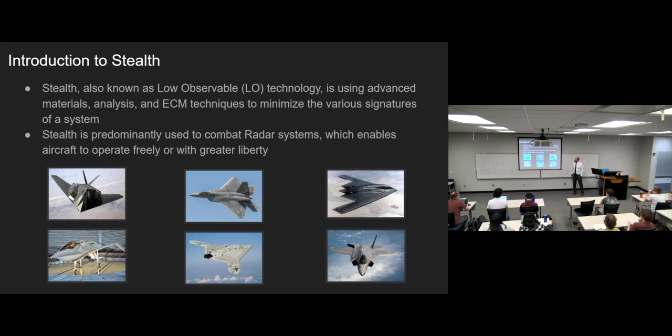Yeah. For anybody who saw the F-47 release that they came out with recently for Boeing's award, it looks starkly similar to this. And if you saw the Air Force new recruiting video, they have a very short shot of what it is. They have a half-second clip. Or if you would recognize the F-22 over here, if you've seen any Transformers movies, that is Starscream right there. Who knew Starscream was a Lockheed Martin ad? F-22 Raptor.

All right, real quick disclaimer. I work at Northrop Grumman. Northrop Grumman has made a lot of these vehicles, particularly this one, and has contributed to all the others, minus the Boeing one. But I personally have not. And I promise I'm not leaking any classified or confidential information. All of this information is open source. All of my information comes predominantly from this stack of textbooks, and I'll discuss these more later on. So I promise we're not doing any code blues here.

So we're going to go into radar cross-section. I assure you these are the only math formulas in the entire slide. I kept it light this time. So radar cross-section is a value that expresses the magnitude of a radar return relative to the apparent size of that target in square meters. Basically, how much energy is reflected per square meter. And the actual official unit for radar cross-section is dBsm, decibels per square meter.

If you Google radar cross-section, people will express it in units of just square meters, but that's not actually very helpful at all. In real life, you have to normalize by adding that decibel scaling to it. It's like 10 log 10 of your square meter size, or your radar cross-section. And obviously, the larger your radar cross-section is, the easier you are to detect. The actual official mathematical definition is rather horrific, and these are still shortened versions of it.

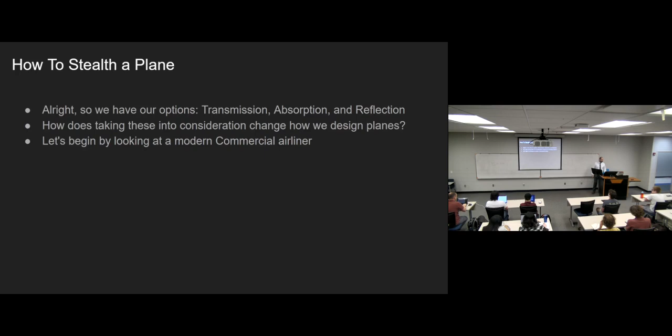And we're going to start by looking at everyone's favorite commercial airliner, the Boeing 737. So, first thing, you guys are all radars, you're looking right at this plane. What are the first problems you might see looking directly into this thing's face? Any ideas? What do we got? Big cross section. Pretty fat, pretty big. And we're gonna get into this, I've got like 4 slides on it. Very colorful as well. Yeah, it's very colorful.

But, huge issue, turbines, these engines. Huge problem. Engines, large trailing wings, large vertical and horizontal aft fins, ailerons. We'll get into why these things are issues, but keep in mind, when you're looking at a vehicle, you're looking for engines, wings, wing sweep, total face-on cross-section, and specifically, this is a big one, any 90-degree angles. We'll get into why that's a huge issue in a second. But the answer is you all already know this. You've been familiar with it since you were probably about 4 years old.

So, we're gonna break this out. The average jet airliner has a radar cross-section of about 1,000 square meters. That is massive. From a radar's perspective, it lights up like a Christmas tree and it is extremely easy to discern what's going on there. So if you ever see reports of a commercial airliner being shot down in war, it was 100% on purpose because they know exactly what that thing is. There is no hiding it. It is obviously a commercial airliner, not military. No military vehicle worth its salt has a cross-section of 1,000 square meters. But it has a litany of issues, as mentioned.

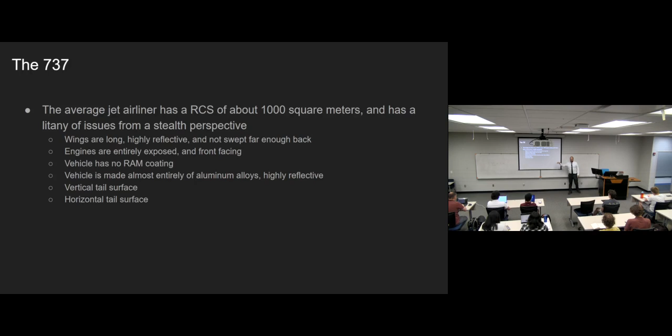So, let's talk shop. How is it that the Flying Dorito, otherwise known as the B-2 Spirit, which has a wingspan almost double that of a 737, has a radar cross-section 1,000,000 times smaller?

How did this happen, right? This vehicle is bigger, it's heavier, it's slower. I think it's actually a bit faster than this thing, and yet this thing glows up like a Christmas tree. This thing is the size of a bumblebee on radar. How'd they pull this off? The answer is with a lot of money, but a lot of science too.

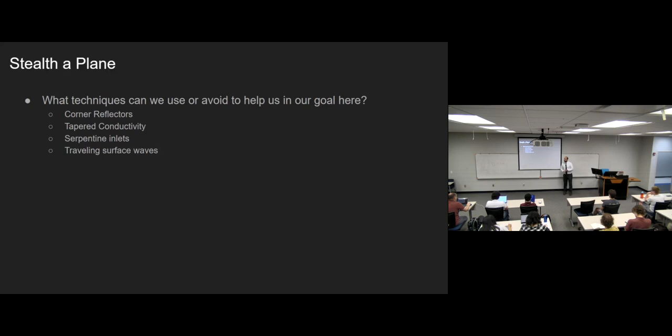So, we're gonna drop some stuff to look for. When you're designing or thinking about stealth vehicles, things you need to care about: corner reflectors, tapered conductivity, and we'll explain what all these things are, serpentine inlets, and management of traveling surface waves. And how this is done, we'll begin.

As I said, you've all been familiar with these since you're 4 years old. Corner reflectors, also known as retroreflectors, are used everywhere. Bikes, the funny vests that the people wear at night when they're trying not to get hit by a car. They're a great way to keep you from getting hit by a car, but it's also a great way of helping you get hit by missiles. So it's not great. The whole point of a corner reflector or a retroreflector is any 90-degree angle, if hit by any angle of ray, will reflect that ray back to where it came from.

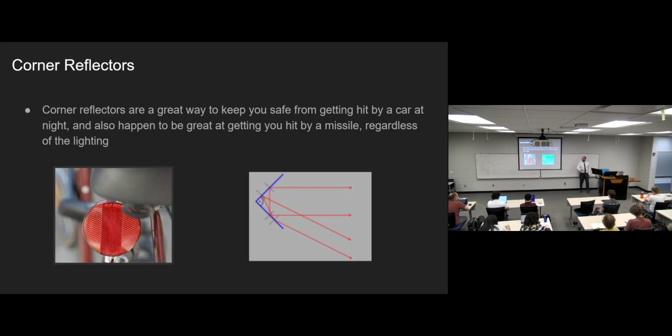So if you aim your flashlight at this retroreflector and you move all over the place, it will still look bright to you because the light will come right back to the source every single time. Which means if you have one of these on a plane, that radar is going to hit you and go right back. And they're going to see you, and they're going to see you pretty well. So you need to avoid these. But let me go back real quick to this.

This is the largest corner reflector ever seen by man. Anytime you see a vertical and horizontal tail surface, that is a stealth no-no. And you'll see a lot of older US military vehicles have that. The F-15, I have an example coming up later. The F-15 is famous for its 2 vertical tail surfaces, and then of course has its horizontal ones immediately there.

Then of course we're still using that vehicle, but we're using the F-15EX. What did Boeing do with that? They tilted these a little bit, and that helped the radar cross-section massively, and it cost almost nothing. So knowing these simple rules, which they did not know when they originally designed these vehicles, is enough to save lives, billions of dollars. It's pretty interesting, but we'll keep moving on back through here.

So the next thing I talked about was tapered conductivity. So what's going on here? Again, we get to cheat and we can call this all optics. Everyone's familiar with Snell's law. Who here does not know what Snell's law is? All right, real quick, I'm still gonna discuss it. Snell's law is a physics concept that has to do with fundamental geometric optics. Basically, and everyone's familiar with this if you've just had a glass of water before, light bends whenever it goes through different media, aka different refractive indices, which is just a material dependent parameter, right?

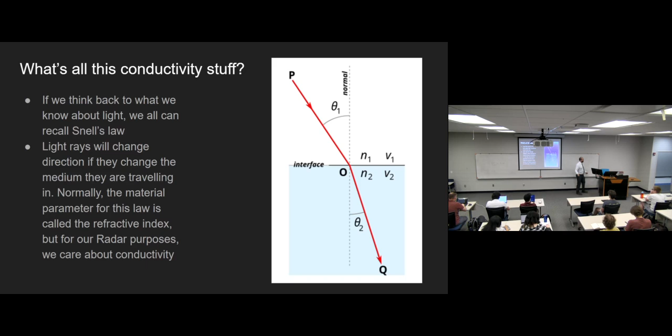The difference here is, for our purposes, the material no longer has a refractive index. It has what's known as a conductivity. Everyone knows what that is. Copper's conductive, rubber is not, right? Everything has a conductivity, and we're gonna abuse that fact to stealth our planes. So, they have markers in here. Yeah, whatever. Discontinuities. Just how light bends when it hits a discontinuity or a difference between 2 media.

Yeah. Got more for you. Oh, Sebastian, what was that?

So, a discontinuity is very simple. Let's call this, we'll call this aluminum, and we'll call this copper. These things have similar yet different conductivities. If I am just a block of copper, a block of aluminum, and I have an electromagnetic wave traveling through here, the second that wave hits this discontinuity, right now it was all just current inside of metal.

But the second it hits this material discontinuity, it radiates and acts like an antenna. And that's a huge issue because that happens literally all the time, and it's related to some of that TEMPEST stuff that we'll talk about at the end for any of those interested.

But this kind of thing happens all the time. Discontinuities in circuits, PCBs. When you're designing high-frequency antennas, high-frequency circuit boards, your whole purpose is to prevent discontinuities. And a funny thing, just for anyone doing circuits later in life, let's say this is all copper. If I have a copper trace of this width, and then I need a thicker one or something, maybe there's a pin here. Guess what? Discontinuity. Because unfortunately, conductivity, while it is a material-dependent parameter, actually can change based on just dimensions alone.

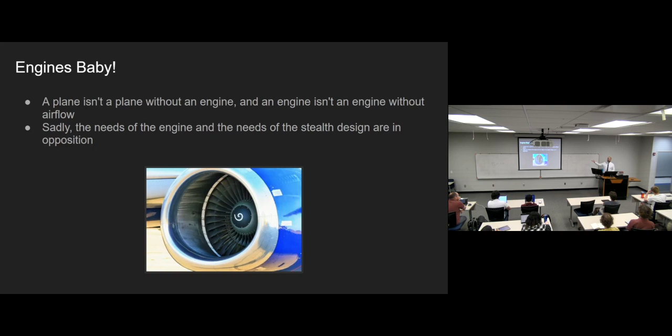So we've had things in the past, and they were shit. This vehicle is historic and is amazing, and it did its job great. The second it dropped its 2 GPS-guided bombs, it was a sitting duck. Garbage. But it still was awesome.

How did this guy mitigate its engine inlets? Well, we can see its engine inlets right here. Well, they're front-facing, just like the problem that we just mentioned. But how they did it was they put a grid. Anyone know what a Faraday cage is? They built a Faraday cage around their engine inlet. They spaced the cage such that it would reflect waves away, and they angled it such that it would reflect it up and away. Problem.

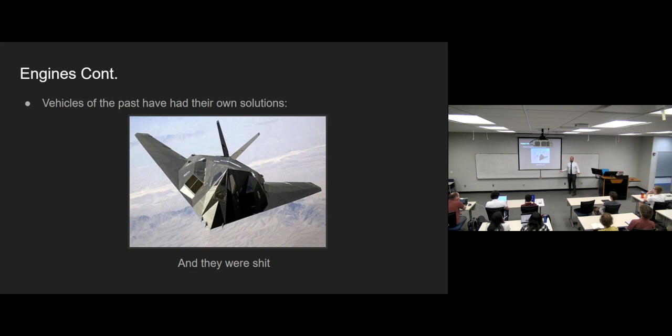Who here knows what happens when you put a cage in front of an engine inlet? They can't breathe. They can't breathe. So this thing was stupid and slow because it couldn't breathe. So obviously we can't allow that to continue because, F-22 Raptor, F-35, these things are high-performance aerobatic machines, right? So they need air.

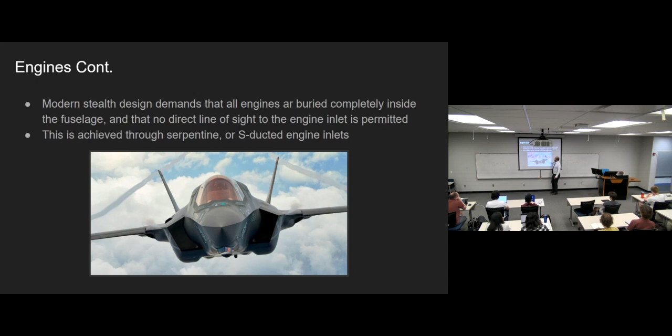So here's an F-35 head-on. You see any props in there? It's a little dark, but you see any props? No. But there's also no cage. So how are they preventing the radar returns? Well, we use what's known as an S-duct, or a serpentine duct. This basically, as I'm sure you can probably assume, this is an F-22, whose inlet is right here. Your air comes in, all you do is add a little bend in the path, out your engine.

So what happens is the radar gets stuck inside and can't escape. Also, you coat the inside with radar absorbent material. You do a bunch of stuff like that, but the other thing you do is there's a bunch of stuff here, like waveguide beyond cutoff, total internal reflection, all that. It helps. It lets you mitigate your returns. And this is how we keep our vehicles, one, from being identified really easily while they're flying around, and two, from just blasting out radar returns like nobody's business.

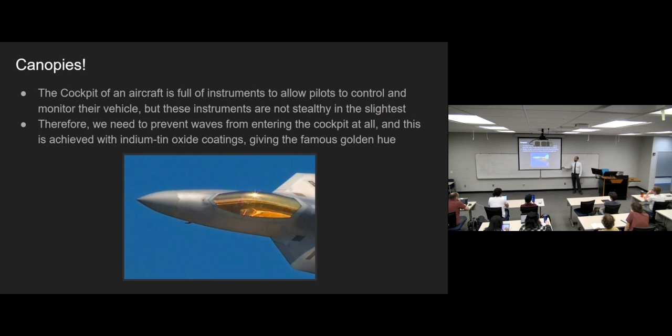We no longer have the restriction of just using aluminum or other metals for our airframes. We have technology advanced enough to get away with using strong composites, and they give us a lot of benefits. They're lighter weight, they have better temperature tolerance, all that kind of stuff. But another benefit they give us, in certain instances, is that they're what's known as radar penetrable, also known as the electromagnetic waves just transmit through them. Like that whole impossible case I mentioned earlier. Ideally, you just want to be invisible and it just passes on through. Well, the answer is we actually can do that to a certain extent, and we do. However, we can't do it for everything. Metal is still important, and where there's metal, there are radar returns.

So we have no choice but to have the other mitigations in place, because we can't just skate by with a composite plane. But we can skate by a lot. You'll see a lot of wing portions, if you look at an F-22 from the top or other vehicles, often they'll cheat and they'll have large portions of their chassis or their wings with some type of composite plate which allows the radar to just go through. So they have a better chance of not getting detected if they get hit from the top or the bottom, that kind of stuff.

So those are all the entry-level ideas of what you want to look for and what you can use to improve the radar cross-section and stealth properties of a vehicle from a radar perspective. It's a whole other ballgame when you start talking optics. But we're going to start with some quizzes here.

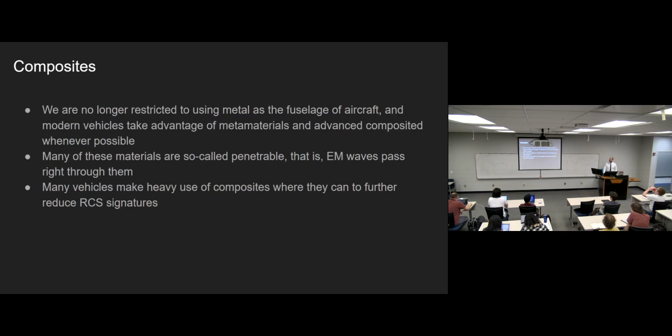Based on what we've said thus far, who has a better radar cross-section? These vehicles are about the exact same size. We have an F-15, we have an F-22. Who wants to go first? I'm pretty sure the F-22 has the larger RCS. I would believe it's the F-15. You think the F-15 is the larger RCS? Yes. You are correct. But why? Well, because it makes use of 90-degree angles, which makes it easier to detect. That's a big problem. Right there. Those big wings. Bunch of 90-degree angles.

This picture's a little hard to see, but what's another issue? Less serrations compared to the F-22. Less serrations. They did not know about edge lengthening or edge shortening. Any other issues? F-15? A lot of external pieces that aren't built into the frame. Okay. No internal weapons bays. All that stuff's on the outside. Gold coating on the cockpit window. I don't see it on there unless it's clear. Yes, they did not yet use reflective coatings. Engine inlets. Engines are straight on.

So this thing sucked from a radar perspective. Excellent vehicle, but that's why we replaced it with the F-15EX, all that kind of stuff. So there's a whole bunch of stuff here, and it's good to see, right? What we're getting out of this, we've got V-tails, we've got serpentine ducting, we've got coatings, all that. And then also, both of them do make use of the swept wing. One did it unintentionally, one did it intentionally, right? Just so happened to be good from an aerospace perspective as well.

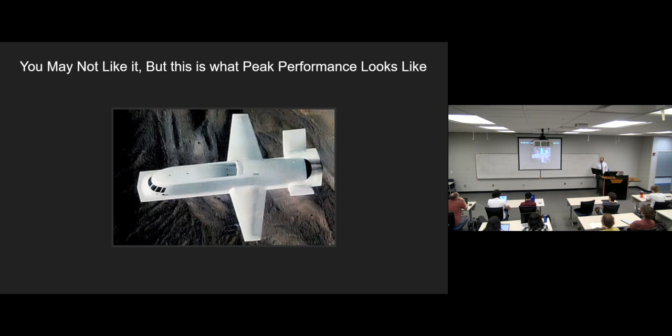All right. In conclusion, we've discussed a lot of things. The concept of stealth, what is a radar cross-section, little intro as to what the aspect angle is. And keep the aspect angle in your mind. A lot of people don't really understand that. But nowadays, you'll start seeing the buzzword all aspect stealth coming around. And particularly as the F/A-XX, the Navy one, and the F-47, the NGAD, start ramping up in development, we start seeing more and more of this 6th-gen push in the news.

You're gonna start seeing a whole bunch of all aspect stealth, this and that. And it's important to note what that means. A lot of people are gonna see this and be like, oh, what does that mean? But really all it means is, from any viewing angle, radar-wise, you basically maintain a very high level of stealth, or a low radar cross-section.

We discussed optical approximations and how it can help you as a designer of a vehicle. Because again, these things are not designed by individuals, they are designed by groups, teams, and in most cases almost governments, levels of people. You're talking about 500, 1,000 people working together to build something like this and make it right. And with regard to most vehicles, RAM and these stealth coatings are not permanent. They have to be maintained.

The majority of the cost of the US Air Force is maintaining RAM, almost always, at least vehicle maintenance wise. You have to paint this stuff on, you gotta apply the tape, and it takes large teams of skilled servicemen to do that. And we have to do it all the time. We have temperature controlled hangars for B-2s because we have to maintain the stability of their stealth coatings.

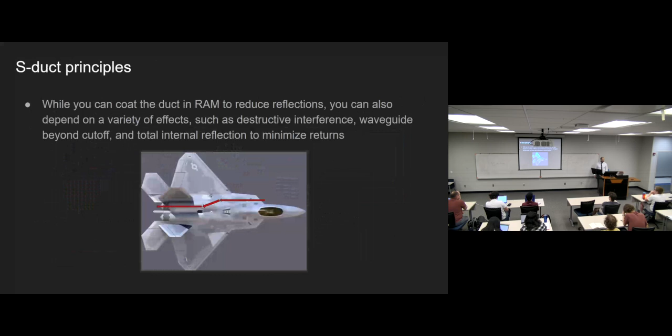But that kind of thinking, we need to get away from the whole I spray on the coating every mission, because that's a huge issue, and it costs money, manpower, time, and worst of all, it's not as good as it could be, and it just straight up limits you. I'm sure that an F-22 can go way faster, but it's limited by its coating alone. It can't, otherwise it's gonna start showing up. Yeah, it's ridiculous. But real quick, we're gonna drop back to the F-35 to talk the paint. Where is it? There it is.

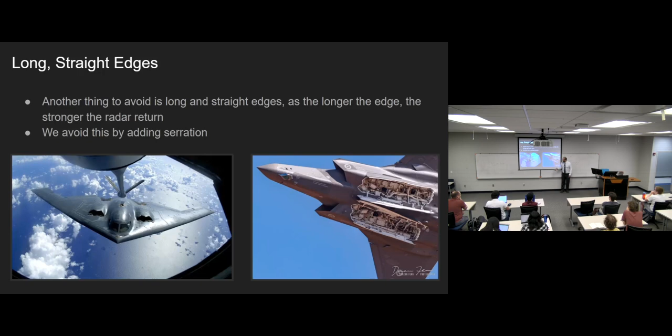It's hard to see on here, but whenever you see this light gray on the F-35, that's the tape. And you'll often see it around a lot of the access hatch edges. Let me go find a picture on Google real quick of the, what is this one?

How did it sign me in? Bruh. 1 second, it doesn't like me. Bruh. Just showing that. Am I? Oh, caps lock is on. He was just like this at work, dude. Yay. Alright.

And they do spend a lot of time on edges because the waves, as mentioned, travel along these edges. That's why, one, they break them so they don't get to travel the whole way and radiate at a higher power. But they also do the whole tapered conductivity, so as they travel, they get weaker, as opposed to getting stronger, which is not great.

But a whole other thing that I did forget to mention here, kind of left it out just from a complication standpoint, no, we're not making new slides, is everyone knows that radars and radio waves have frequencies, right? You could be in the kilohertz, the megahertz, gigahertz, the works. Unfortunately, depending on what the frequency of your radar is, completely changes your stealth properties.